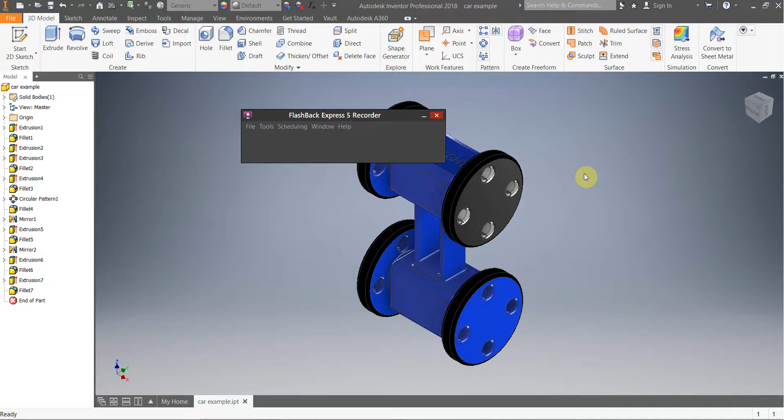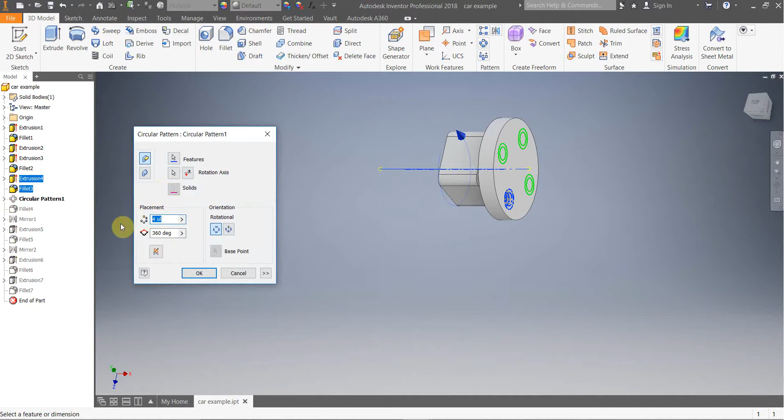Alright, so what we're going to do is create this little car. It's actually fairly straightforward and simple, though it looks a bit more complicated than it needs to be. At the end of the day, it uses tools that allow you to adapt all of these things. So if I go through and change this circular pattern all the way back here to like 8 units, it will update it on all of the wheels, enabling you to make changes very easily for the whole thing rather than doing everything manually.

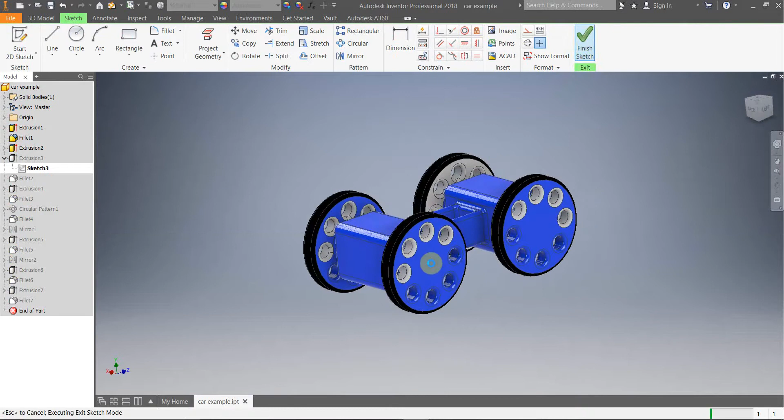So I could change how many holes there are in the wheel, or do simple things like change the diameter of the wheel to 75 millimeters. If I go OK, it'll update all of the wheels and make them bigger. Rather than drawing things 4 times, the process you use to make this allows you to just change one dimension and it will update all of them automatically.

So what we're going to do is start a new part file. Make sure you're still working in metric, with your standard millimeter units. It's going to be pretty straightforward when it comes to constructing it—there's not too many hard parts. It's just a matter of using the new tools that you guys aren't really familiar with.

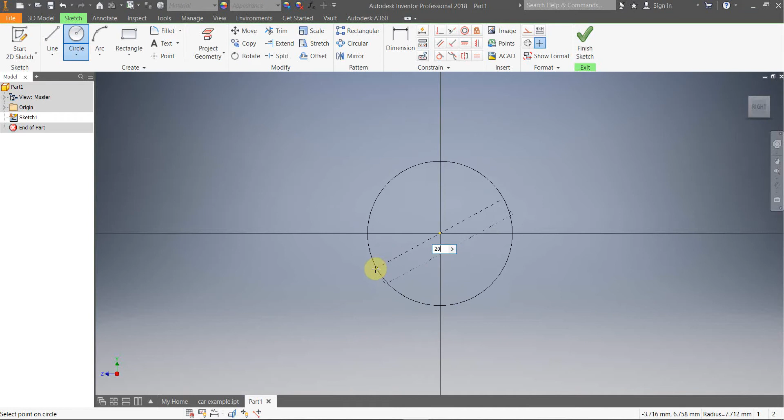So you're just going to start with a sketch. Basically all we need is a couple of circles, so I'm just going to make up some measurements: 20 millimeters, and then I'll go 21, which gives us a little bit of a gap. Then I'm going to put a 2-point center rectangle here and cover that—I'll go 25 by 25.

Basically, this is going to be your axle on the inside, and the outside is going to be the body of your little car. So I'll say that's done—I've got 20, 21, and then 25.

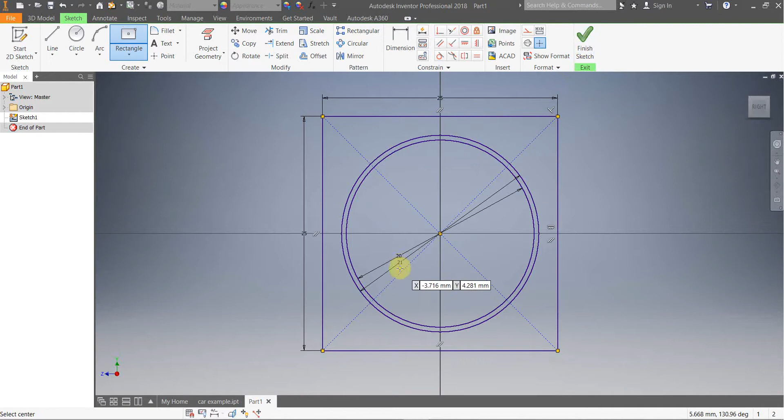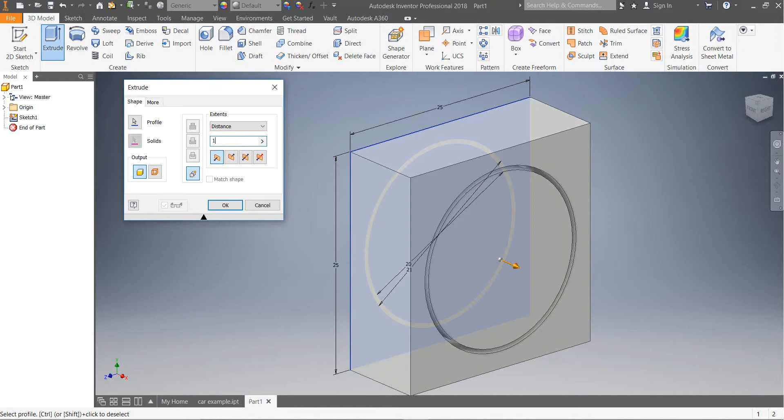When you click the extrude button, it's not going to do anything automatically like it normally would with a single shape. When you've got multiple shapes, you need to select the profiles you want to extrude. In this case we want the body, and we also want the inside axle to extrude, and we're going to make that 15 millimeters, then press OK. So now we've made the outside body of our car, the axle, and the air gap.

So if you were to print this on the printer, it'll actually print with a gap in there, and that center bit will just fall out, because there's nothing holding it in there right now until we put our wheels on. But it allows that center bit to spin, move around, and come out.

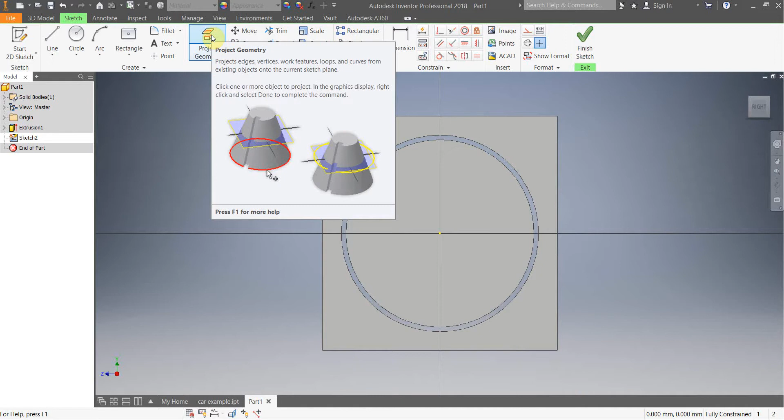Now, rather than extending the axle out, we're just going to go to sketch and click on the circle. To make sure we've got the same diameter, rather than drawing another circle, I can just press this one here, called project geometry. What that does is copy a shape—so if you've got a dimension in a sketch before, I can click project geometry, then click on the outside ring of that inside circle, and it'll turn yellow. So rather than redrawing it, that's just copied and pasted it into the new sketch. Does that make sense? These are all just things to make it easier.

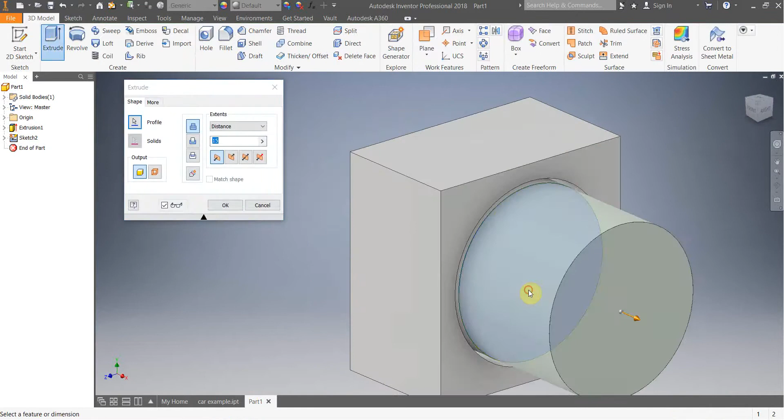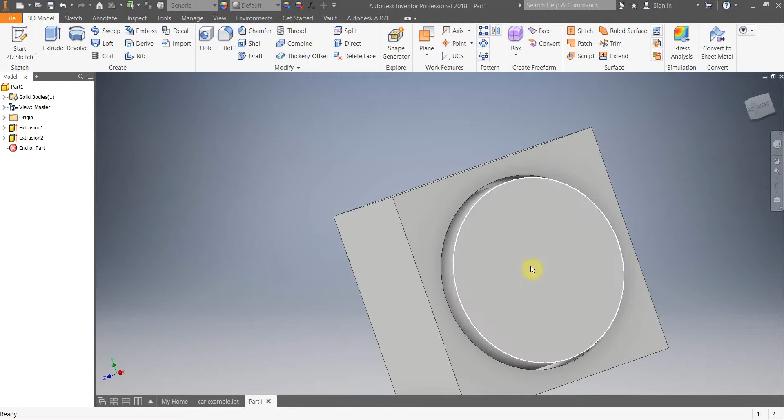So then I'm just going to finish, and extrude that out 2 millimeters. Now when you look at it—I'm pressing shift and my middle scroll button down so I can rotate around—it's got that air gap in there. Because if I just drew the wheel on the edge of that, it would actually link into the body and make one solid object, which is not what we want. So now I've got an air gap.

On top of this one here, I'm going to place my wheel. So my wheel is just going to go on there.

I'm just going to draw a circle, dragging it out, and go 50, then enter. All right, and that's my wheel done. Finish, extrude that one out, and I'm just going to say 10 millimeters.

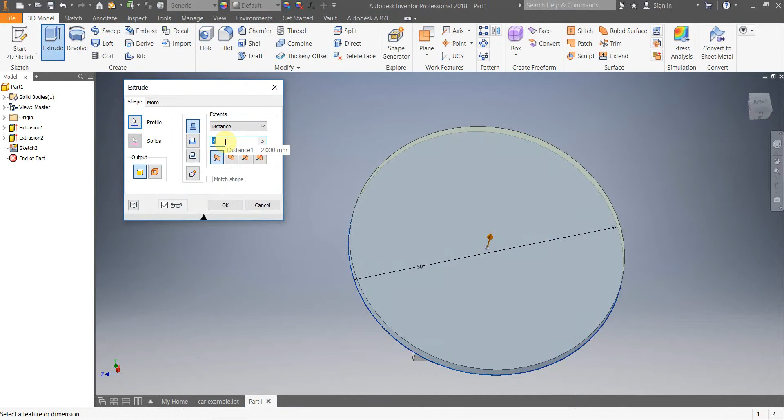All right, so now I've got a single wheel, part of my axle, and part of the body of my little car. A few things you want to do before you start mirroring this around and copying and pasting it, you need to add in a few details.

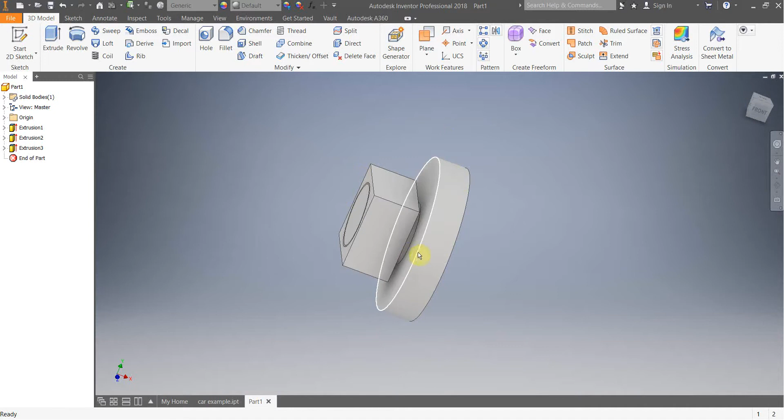So I'm just going to go through, and where I think, I'm just going to put some fillets and change some different sizes and those sorts of things. So I'm just changing these up. You can do the same dimensions if you want.

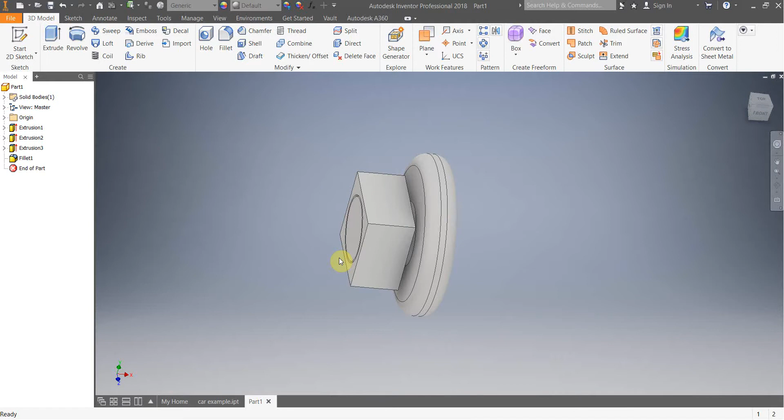Another thing that's super handy is if you're going to 3D print things, you need to figure out or consider how it's going to be made. So if this was going to be printed and it was sitting like that in the printer, if I can get that sitting flat, what happens is it prints layers going this way.

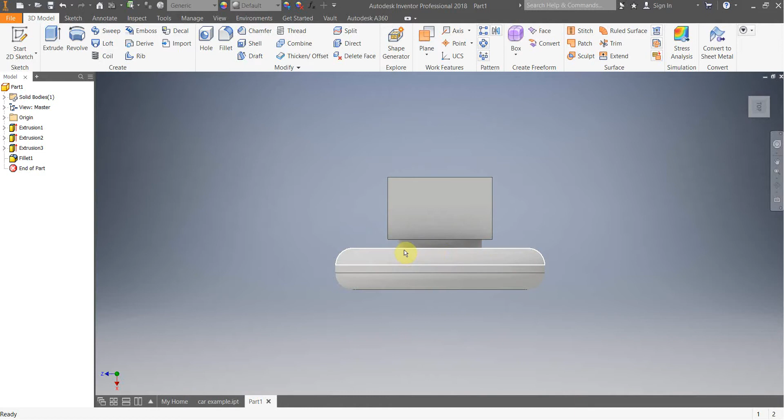So the layer between the body of the wheel and the axle is only one individual layer. What that does is it actually makes a very good, well, an easy breaking point for the axle to the wheel, because it's not a very good join. It's just a straight join, just an individual layer sitting on top of each other, and then it's just a massive change in dimension.

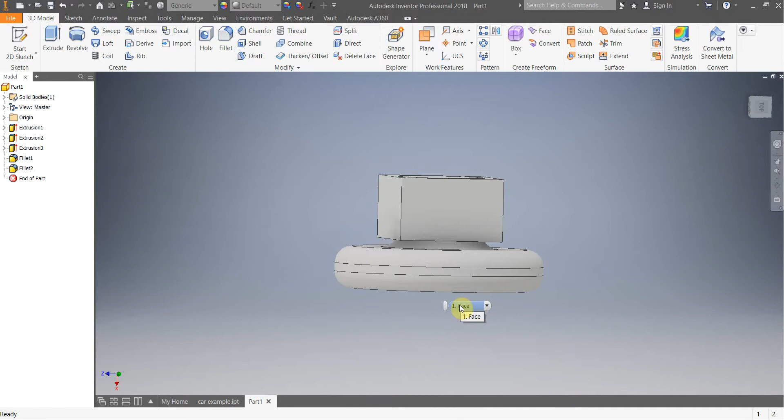So what I like to do is, if I've got areas like that, and it's very handy when it comes to doing other modeling, I'll put a fillet in here as well. What that does is it tapers down the layers in the printer rather than just jumping from a really wide one to a narrow one, and it reduces the breaking point that it's created when it prints. So that allows us to get that detail in there as well.

Now I'm also just going to put some more fillets on here as well. I might just change this down to a 2. I'm just going to go through and fillet these edges around, so I'm just shift, middle mouse button, rotating around again, just selecting all these ones. Not that one, that's not what I wanted.

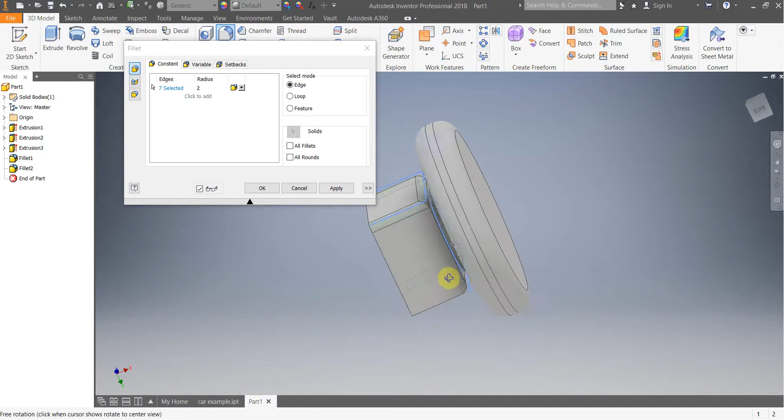So why would I just be selecting these outside, these edges here? I'll finish that so you can see what I've done. Why would I not select this one in here?

Yep, so it's going to be mirrored. So if I put a fillet in there, basically what that's going to do is, when you mirror it, it'll be dipping in the middle, because you've got two fillets that are joining together, which is not what we want. We want a nice solid body and then just fillets on both ends.

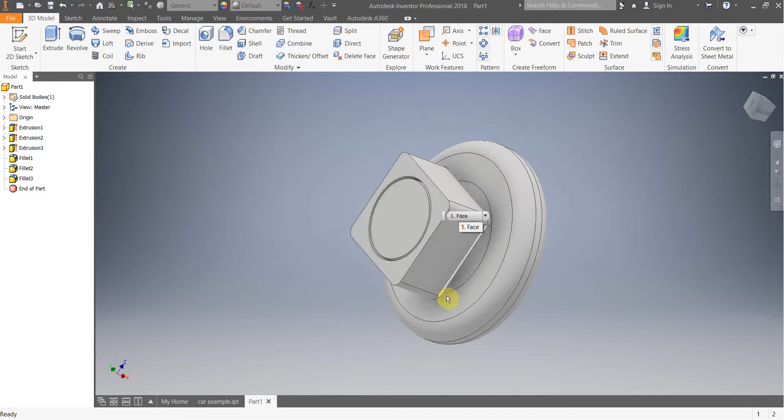So we've now got our fillets in there, so the main body is getting very close. Now what I want you to do individually is come up with an idea of what you could put on your wheels. The other example just had some holes in it, which is fine.

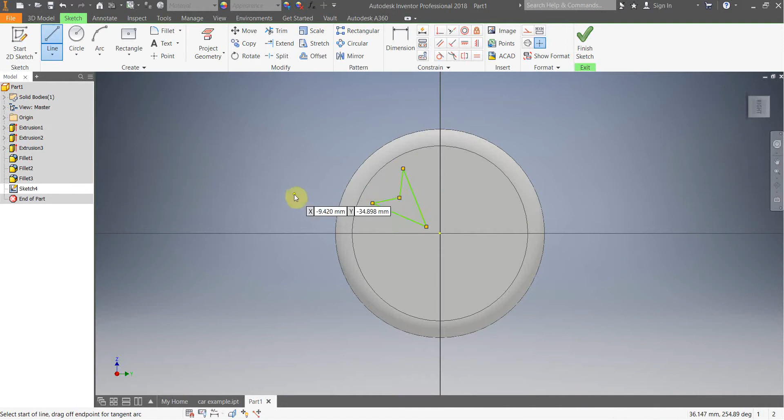You could do some really cool things when it comes to sketching on your wheel though. So here, for example, if I got my line tool, I'm just going to draw some random stuff because that's just the way to do it. So if I had that sketch, for example, what I can then do, as long as you've got this center point in the right area, you can actually start to...

Copy that sketch and rotate it around that point there, and then you can pick how many you want. So I could say 5, could say 6, or whatever. Now there's two options to do it: you can rotate the sketch or you can rotate a feature.

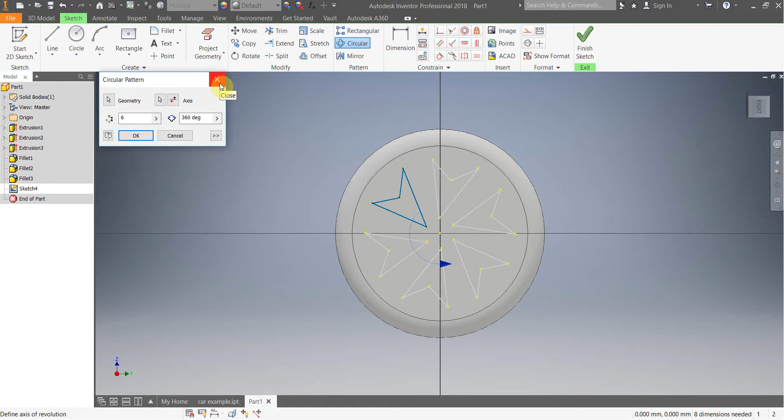So there's one way to do your sketch if you want to do it that way. Or if I go finish, I might extrude this out. For this one here, I might do it a little bit differently - I might say it's going to go out 2 millimeters or something like that.

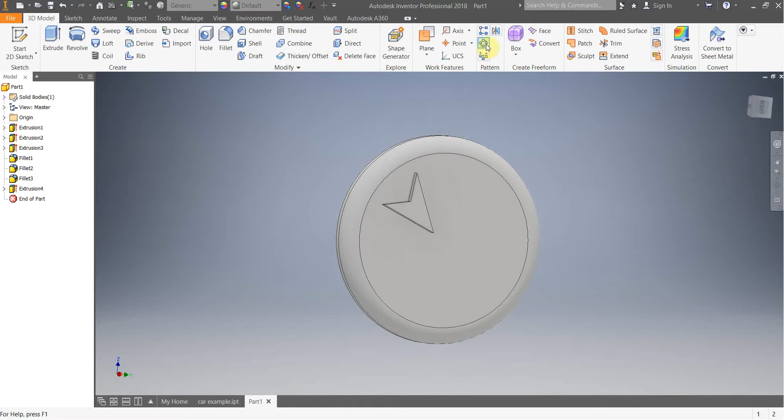So now I've got on my tree, my model tree down here, I've got the extrusion there. Then I can do the same thing - I can go to that one, my feature that I want to pattern is that one there, and then axis.

The reason why sometimes it's easier to do it in a sketch is that finding your rotating axis for a feature can be quite hard, but essentially it's in the origin box, and then you've got the X, Y, and the Z axis.

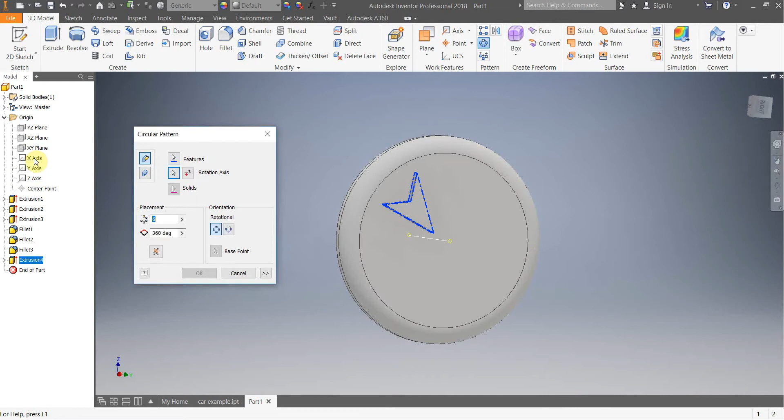Now, sometimes it'll come up and preview where it is. So now I can preview which one I want. So I want that one there, and I might say that I want 7, and then it will evenly space it over 360 degrees. If I click OK, then that's on my wheel. So rather than drawing it 7 individual times and making sure it's all the same, use these pattern features to get this done.

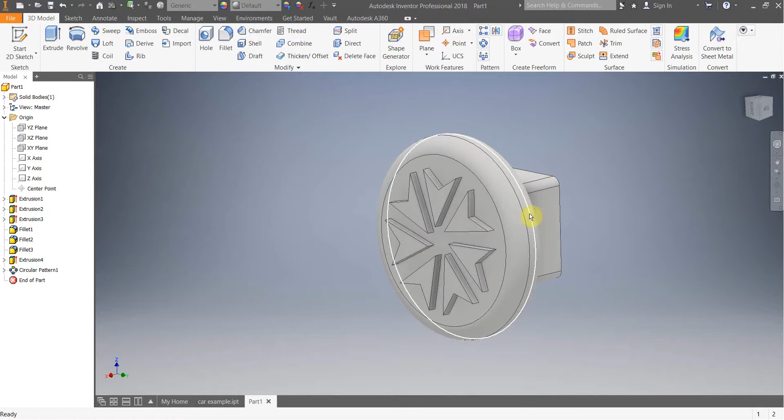So that's the first time you use the pattern feature for this one, and then we're going to use it a few more times. So that's that pattern feature there. What I'd say is that is complete. So you've got your wheel, you've got your axle, and you've got your body, you've got all your fillets and that sort of stuff complete.

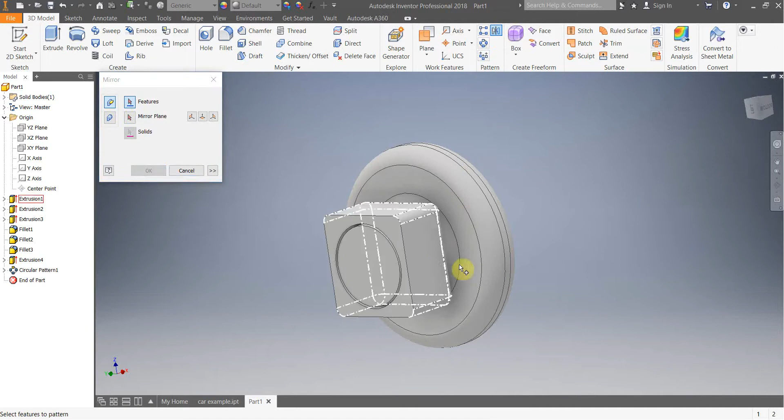What I'm going to do now is use my pattern tool again, called the mirror tool. We are going to select all the features, so I'm just going to go select all of it because I want everything to copy. My mirror plane is going to be that inside surface of my body. As soon as I click that, I click OK, then I've got 2.

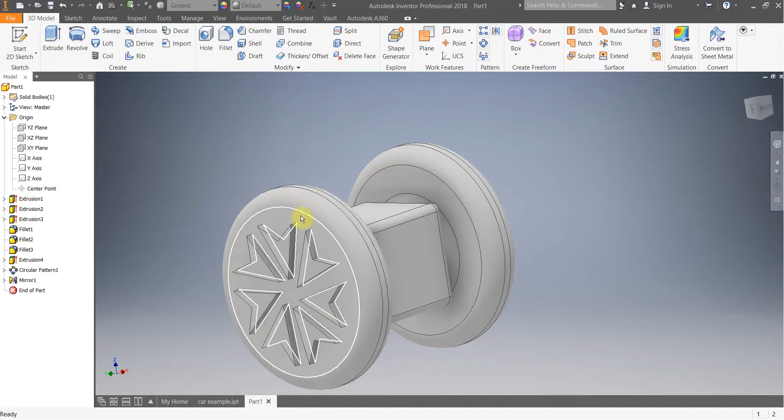Once you've got that, all we need to do is make an extend of the center. So that's your front part of your car. What you can do is actually go sketch onto this one here, and I could add a cylinder or a rectangle, whatever I want, something in here just to join it together. Finish that sketch, and then I'm just going to extrude that out.

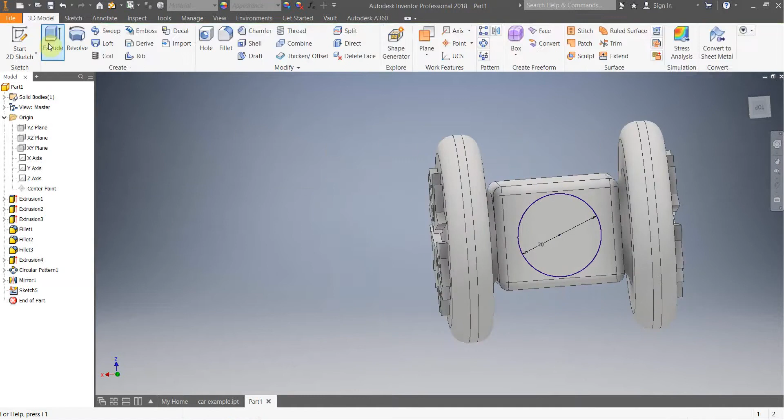I need that to be past where my wheel is, so I'm just going to throw in a few dimensions here. I think 20 would be good, should be able to do that fine. Same thing again, I might just put a fillet around here just to make it look a little bit neater. And then I'm going to do the same thing.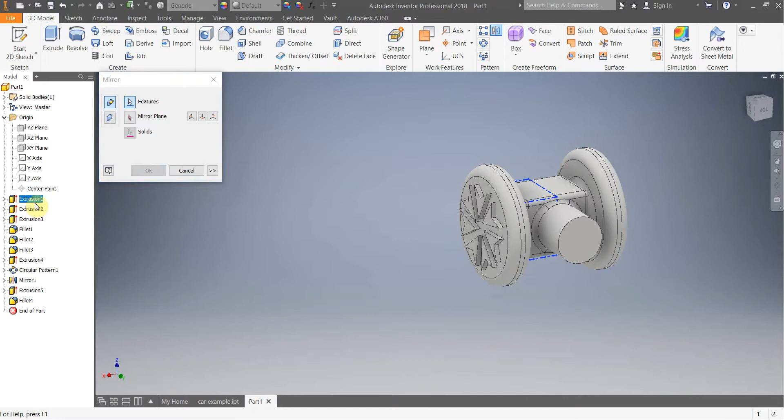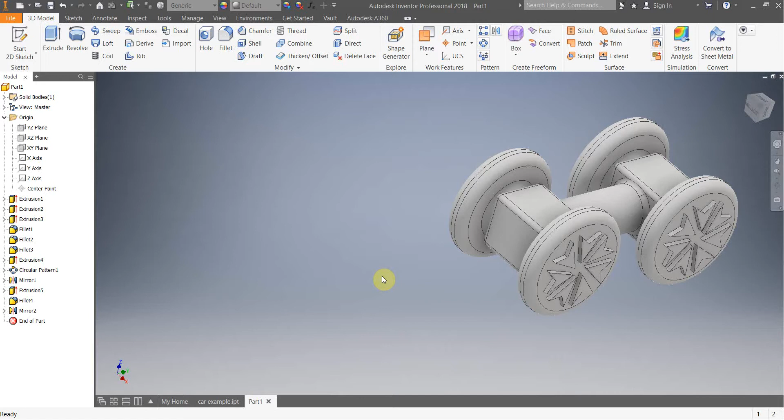I'm going to go mirror, and I'm going to select all of my things because that's what I want. My mirror plane is going to be that bit there, the end of my cylinder. I'll click OK. So now I've got my little car. Rather than drawing all the individual components, I've just used the mirroring tool twice, and I've gone from having a single wheel to having all 4 wheels and a full body on a car.

Now, if you want to, this is when you can start modifying it a bit more and adding some cool things in there, depending on what you want to do. So, for example, in the example car, I've just put my name in the front, which is very easy to do for people that haven't done too much text before.

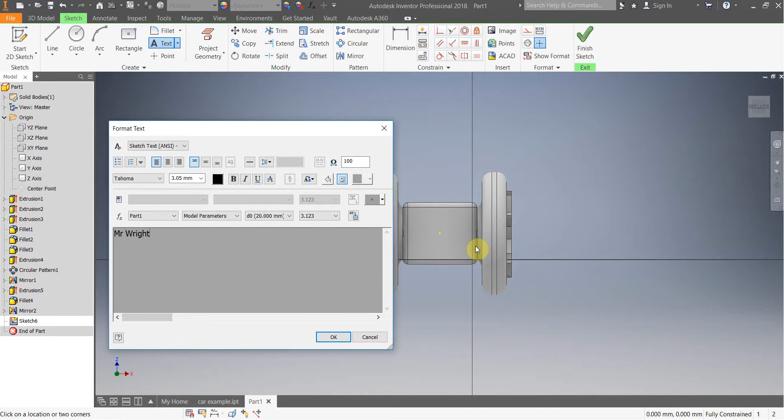You just start a sketch, then you go text, click where you want it, and then you just write. If it's upside down and those sorts of things, you can click the rotate tool, click on my writing, and my center point can be anywhere. So if I just click here, it's going to start rotating around that center point like that. So I might put mine on a bit of an angle, which is fine.

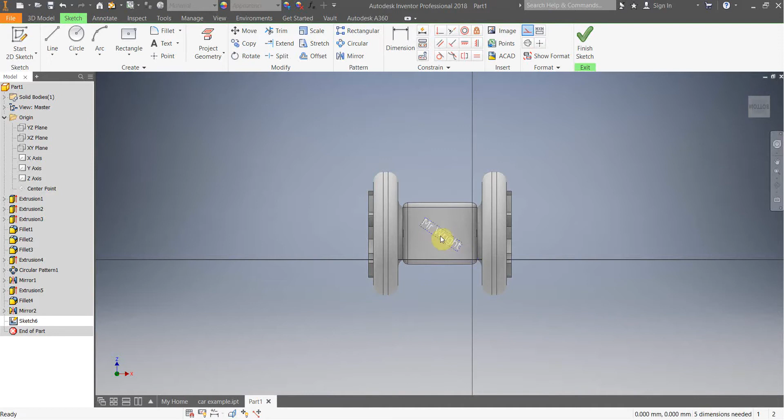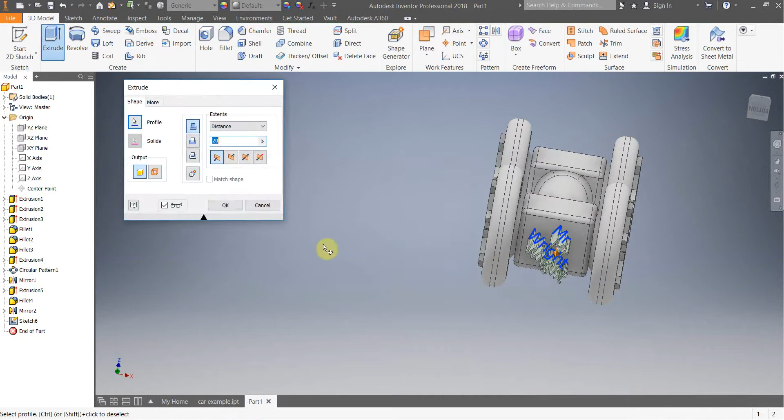Drag it back in there. I might make it a little bit bigger, so whenever you change anything in text, you've got to highlight what's going on. I'll try 5mm, see what that does. Might not fit in there, so I might just center it and see what that does, might make it a bit better. Finish that one, I might just extrude that but cut it, which is the second one, and just say 1mm, and that'll cut out my name in the front.

All right, and you can start adding some different features. So the whole reason we're going through these steps here is because this is how you can make something very easily and modify it easily as well.

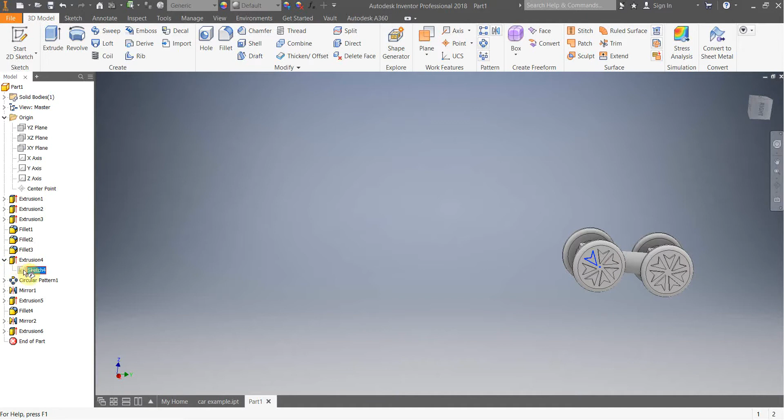So if I didn't like my wheels, as I was saying before, I could go back into, I'll just open up that extrude because that's the sketch for it, open up the sketch, and I could just modify this sketch and change it around a bit so it looks like that, and just go finish, and it'll update on all my wheels. If you had to go through and update every single individual one, that would take you a very long time compared to just using the tools that I've just shown you then.

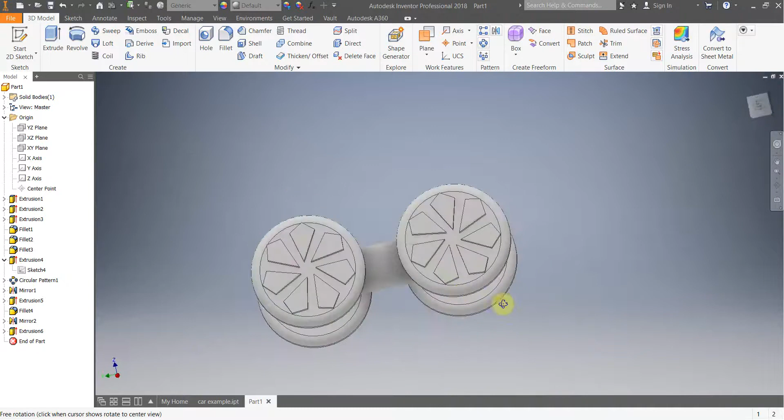Any questions about that? All good?